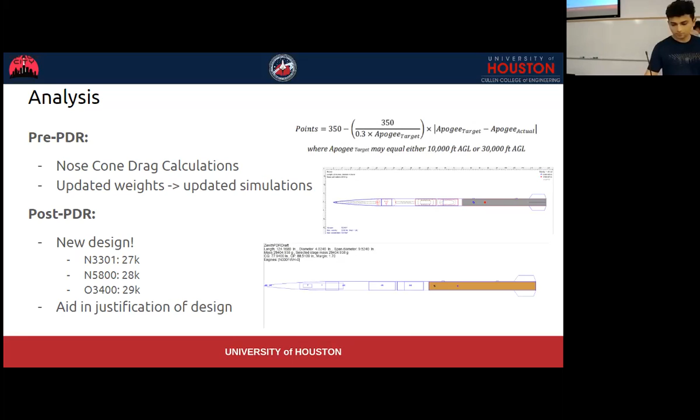Yeah. I guess you can also introduce yourself. Yeah.

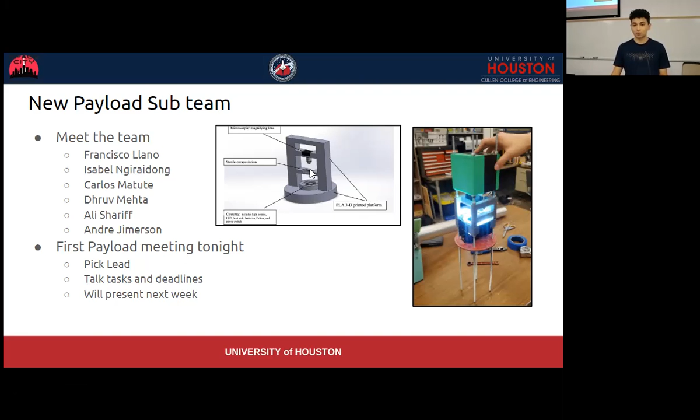And also last year it was a 6-inch diameter rocket. Now we're going to 4 inches potentially. So we have to redesign a lot. We'll talk more about that tonight.

Good you're here. Now propulsion, Tala. Here we go. How's my audio? Great.

So for propulsion, one of the main differences that we got out of the PDR is that we are currently considering a third motor. Our primary selection was the N5800 with a backup of the O class. Now we add another one to the mix, which is the N3301. One of the things that was harped on a little bit was that we may need more impulse than we get with the N5800, and that we should maybe look at motors with a longer burn time, for the sake of getting to the apogee that we need.

And as far as actually getting the motor, the first batch of emails to vendors went out last weekend, I believe. No substantial email response yet, though. I only say substantial because the emails that I received back are not really helpful. But that should be taken care of. Hopefully by the end of this week, we should have some sort of solid answer, if not sooner.

As far as how the rest of the semester is going to shape out for hands-on work, we will be having a mock motor grain assembly for everyone to get a feel of how we're actually going to assemble it towards the end of this semester. So of course, not actual rocket fuel, but we will be making our own mock rocket fuel, which I'm excited about. So that should be one of the big things coming up.

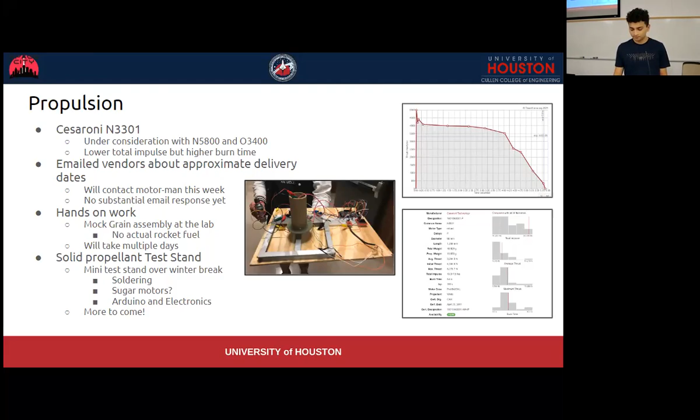So after the PDR, we got some feedback on our snatch force calculator, and I ran the numbers yesterday with another calculator, and the snatch force is actually around 130 pounds of force, which is significantly lower than 3,300 pounds, which means that we don't need quick links, swivel links, or tender descenders that are rated for like 6,000 pounds. So that's gonna save us a good amount of money, as well as a little bit of weight.

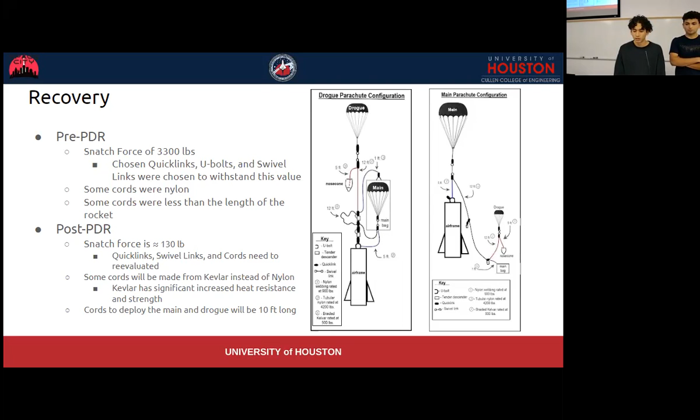And moving on to after the PDR, basically, we just need to reevaluate a lot of our components, especially relating to how strong these components are and making sure that they can withstand our new snatch force. And we also have to finish up the initial design for the bulkhead. We met up today during the lab and worked on that, but we still need to decide some other factors before we can finish it completely. And once we do that, all we have to do is make sure that all of our decisions make sense and that our system is as optimized as possible.

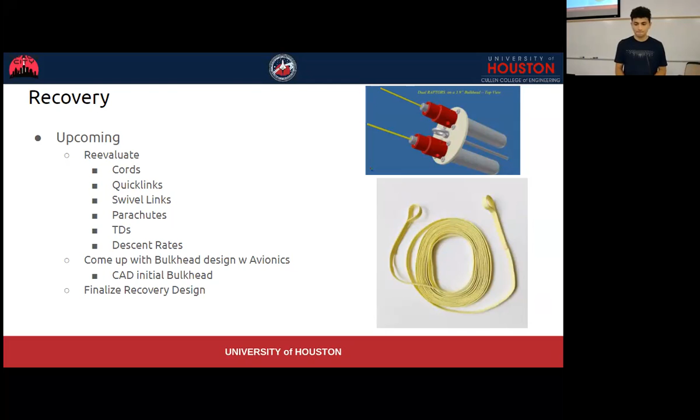Alrighty, so for structures. We're sticking with the Von Karman nose cone that we had selected. Analysis said that they still potentially wanted to go through the drag calculations again, but we're gonna stick with Von Karman. And as far as the layout goes, we're still planning on having the payloads, the coupler, the avionics bay in the upper airframe, and recovery in the nose cone and attached to the avionics bay.

I know it wasn't all discussed with y'all, but there was talk about moving some things in case we had to scrap other ideas, but instead we're just gonna go to a 4-inch diameter. So instead of having an internal MMM, we're now gonna have an external modular fin canister. These are 3 old designs that we had started considering at the very beginning of the semester, before we had switched to MMM and then back to MFC. So we'll be going back to considering designs for this.

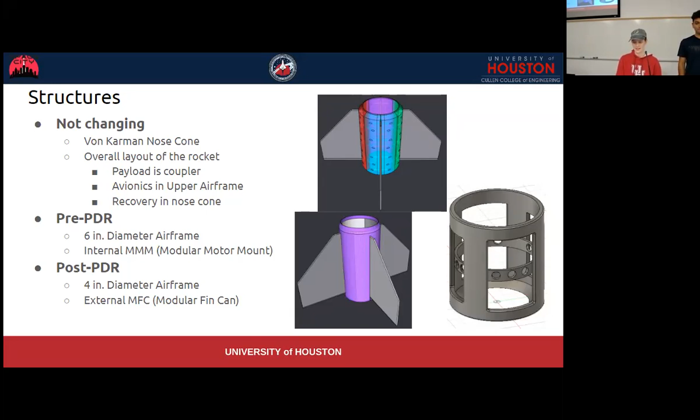As far as what we're doing now, we're gonna meet a little bit tonight and we're gonna talk about the old designs. We're going to discuss how we can improve upon them or if there's any new ideas we can come up with. And then we're also going to try and get a CAD as soon as possible of a finalized design, and then hopefully give it to analysis and run an FEA on it.

And then also we need to find new pricing for the materials for the couplers, airframe, and nose cone, since everything that we had previously is now gonna have to be cheaper, so that's good for us. Then we just need to finalize materials for anything else that hasn't been determined yet, like for the MFC design. So yeah, that's what structures has been up to.

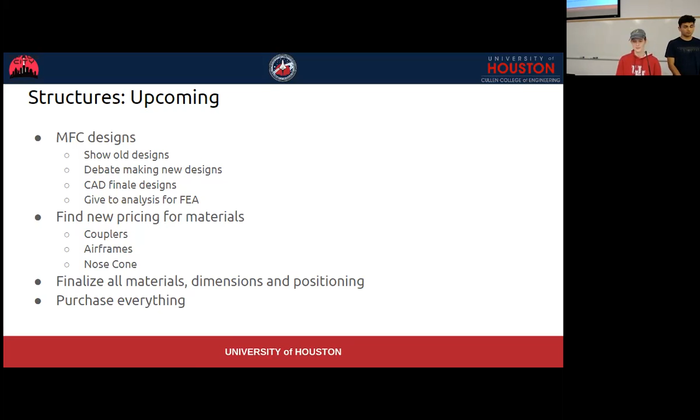Ozzy, I got a message from you saying you might not be able to present, but are you here? I'm going to be presenting. I'm Isaac Johnson. Yeah, let's go, Isaac.

All right. So prior to the Thanksgiving break, we met with the capstone team and we worked with them to pour resin into the 3D printed mold that Ozzy made. And we kind of molded out the combustion chamber out of resin, and then let it cure over the weekend in the lab. And then on Monday before Thanksgiving, they took apart the mold, and they ran into a little bit of problems with it. I think a little piece might have broken off, but it's good now. And it was just kind of difficult to take out.

And now the capstone team is preparing the final assembly of their prototype to present for their project, and we'll continue to develop the hybrid motor over next summer.

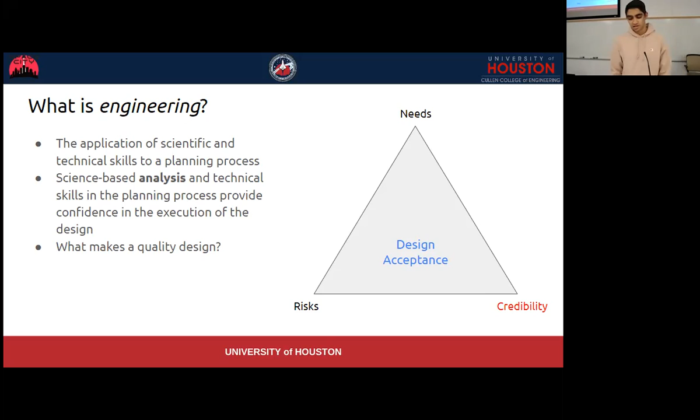First, before we answer the question of what is analysis, we must answer what is engineering. It is the application of scientific and technical skills to a planning process. Science-based analysis and technical skills in the planning process provide confidence in the execution of design. And the three pillars of design acceptance are needs, risks, and credibility, which is where we come in. So analysis, our goal is to provide validation of design.

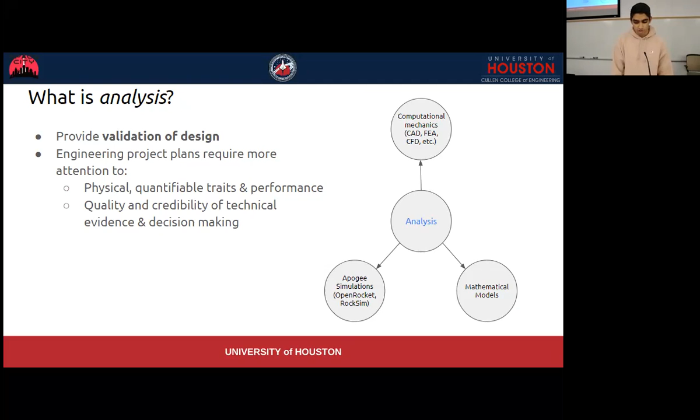In general, engineering project plans require more attention to physical, quantifiable traits and performance, and quality and credibility of technical evidence and decision-making. And these are two categories or requirements that Spaceport also takes into consideration when evaluating us at competition. So the three main branches of analysis include the computational mechanics, or CAD, FEA, and CFD, apogee simulations with OpenRocket, RockSim, and some mathematical models. So today, within these three branches, I'll be talking about CAD, FEA, OpenRocket, and then some stuff on rocket stability.

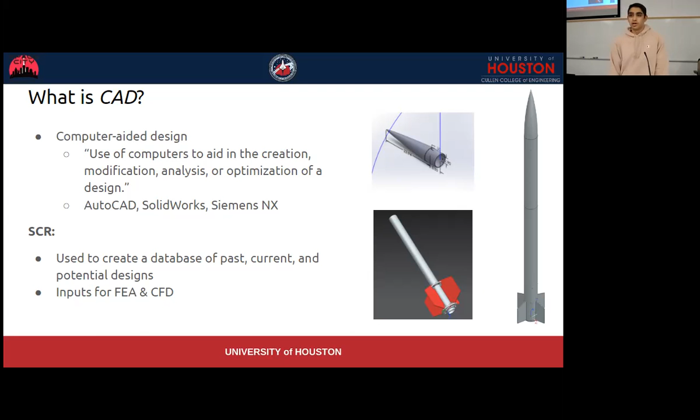So first off, what is CAD? It is computer-aided design. It's the use of computers to aid in the creation, modification, analysis, or optimization of a design. Some examples of CAD softwares you may have experienced are AutoCAD, SolidWorks, and the one we're grateful to use, Siemens NX. And within the team, we use CAD to create a database of past, current, and potential designs, and also hopefully use them as inputs for FEA and CFD analyses.

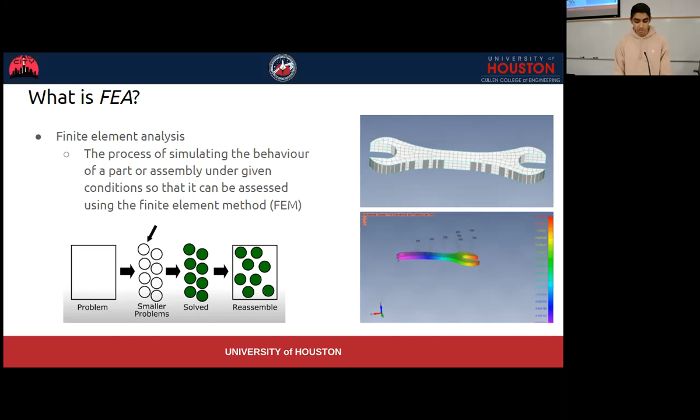So the general process: first, you're going to define the problem. So what do you really want to know? What do you want to gain? Then you'll create a model using the CAD software, as we talked about earlier, creating as accurate a representation of the object or system as you can. And what we've learned through our experience is that it's not always as accurate a model, but really how can you learn to simplify your model to still give you a good result, but not necessarily at the same level of complexity.

Then you'll define your loads, constraints, and then mesh the model. So this is where you define the forces that your system will undergo, and then identify the points of constraint. Then you'll define what analysis you want to perform, what data you're really looking to gain from performing the simulation, and then you'll submit it to the solver and post-process. So you'll submit it for simulation, and then after the simulation, process your results and determine what you can conclude from that. So how does that apply to us? Well, we really want to learn where FEA is necessary and also specifically understand modes of failure.

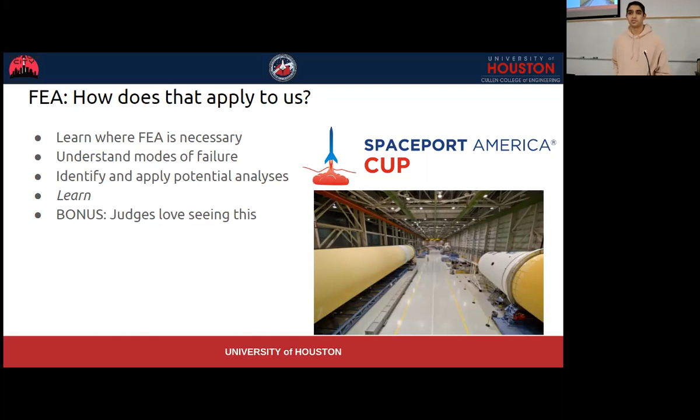Something that Randy has always pointed out at the PDR and beforehand is that I want you to think about all the different ways in which your rocket can fail and then design around that. So that's one of the ways we think FEA can help us out. Also identifying and applying potential analyses and really just learning more about the process in general. And as a bonus, the judges at Spaceport America do love to see some finite element analysis done on your systems.

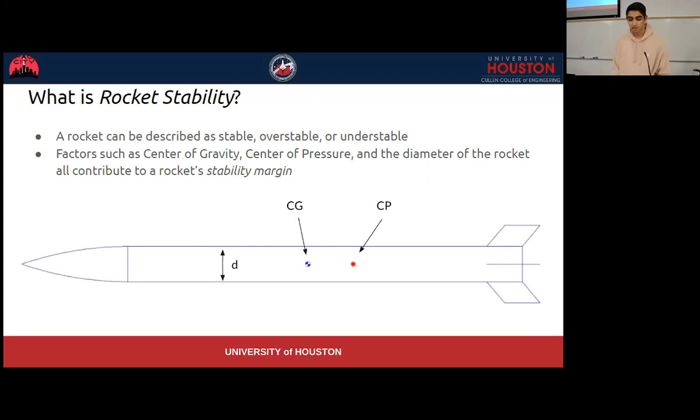So now moving on to rocket stability. A rocket can be described as stable, overstable, or understable. Different factors such as the center of gravity, center of pressure, and the diameter of the rocket all contribute to a rocket's stability margin. You can see the symbols we use for center of gravity and center of pressure there, and then the diameter of the rocket.

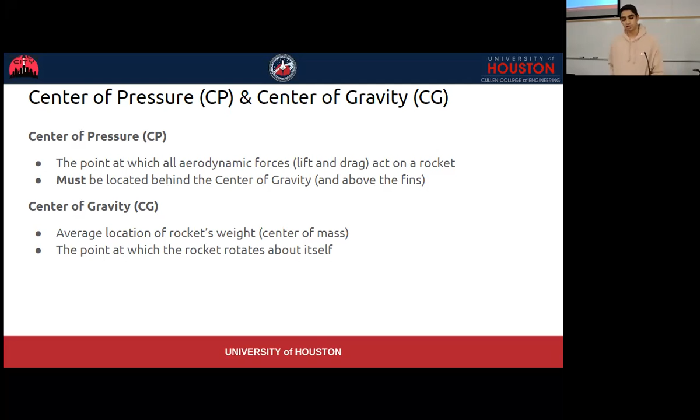So center of pressure and center of gravity. Center of pressure is the point at which all aerodynamic forces, or generally just lift and drag, act on a rocket. This must be located behind the center of gravity and also above the fins. And the center of gravity, pretty self-explanatory, is just the average location of the rocket's weight, or the center of mass. It's also the point at which the rocket rotates about itself.

So now stability margin. This is used to relate the distance between center of pressure and center of gravity, and it is measured in calibers. A caliber is just one rocket diameter. So for Zenith, if we go with 4 inches, one caliber will be 4 inches. In general, if your stability margin is greater than 1, you're considered stable. Although per the Spaceport America Cup design regulations, nominal stability is between 1.5 and 2. And if you're greater than 2, per these regulations, you can be considered overstable.

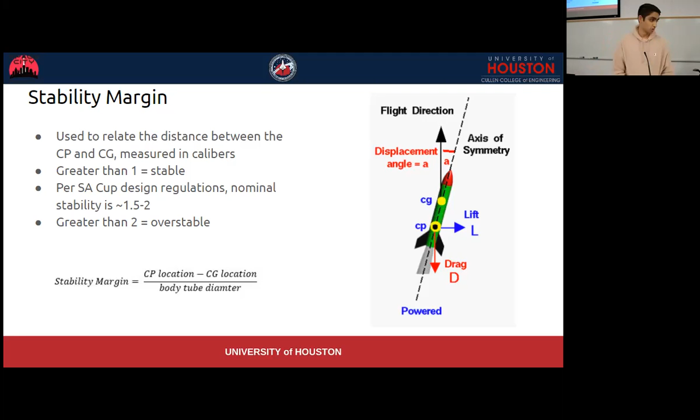So there's a nice little diagram of CG and CP and how they act on the rocket. If you have any questions about that, feel free to ask. But there's also a more detailed explanation of this in the first analysis lesson that you can go back and watch on the recording on YouTube. Any questions?

Yes. When will the FEA be done? Fortunately, I'll be leaving the team and not completing them. Just kidding.